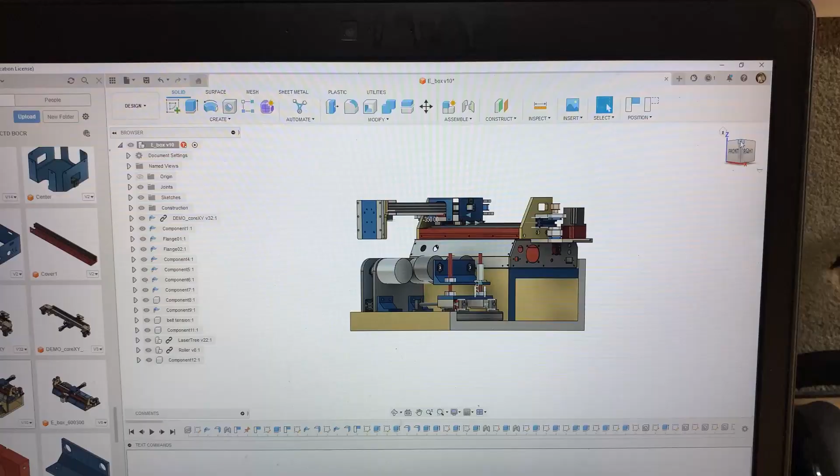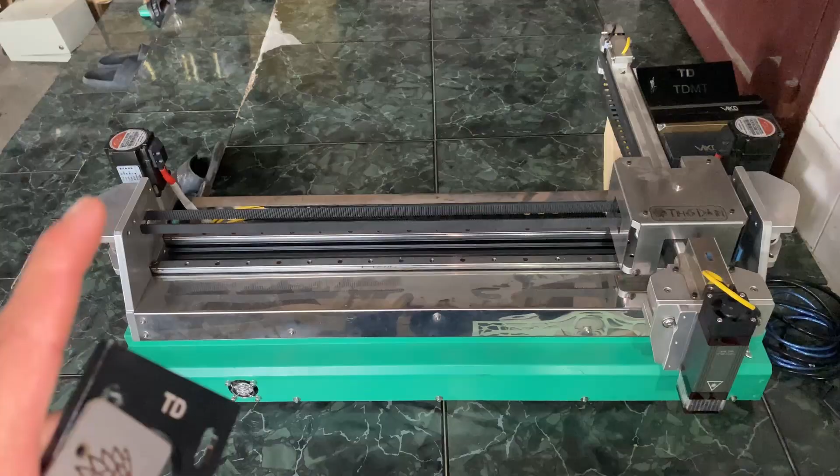I've just got a new order from a customer about a laser engraver on metal. This time we're going to work on the X and Y plane, not including the Z axis down here. Here is the old version of the machine, which let me get my new deal. Thank you. As usual, from drawing to real thing, we have to search for raw materials.

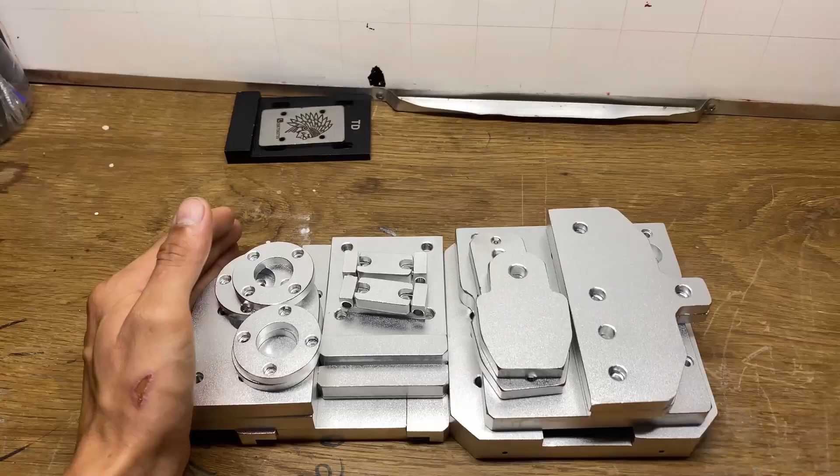The aluminum part is right here. Sheet metal for covering.

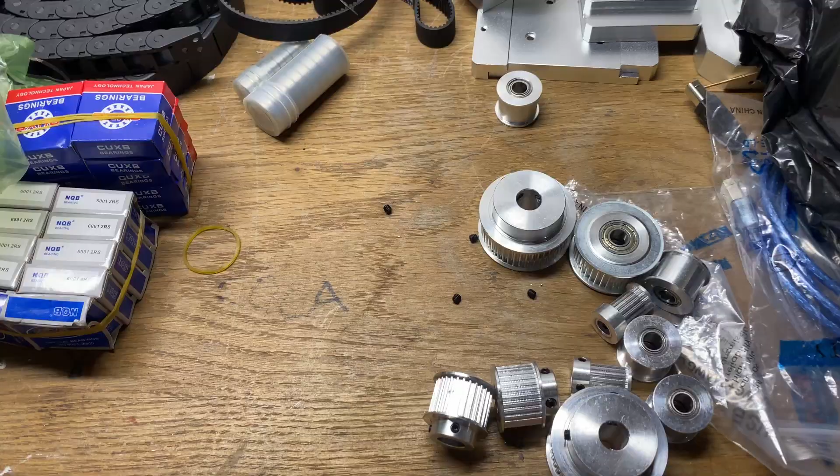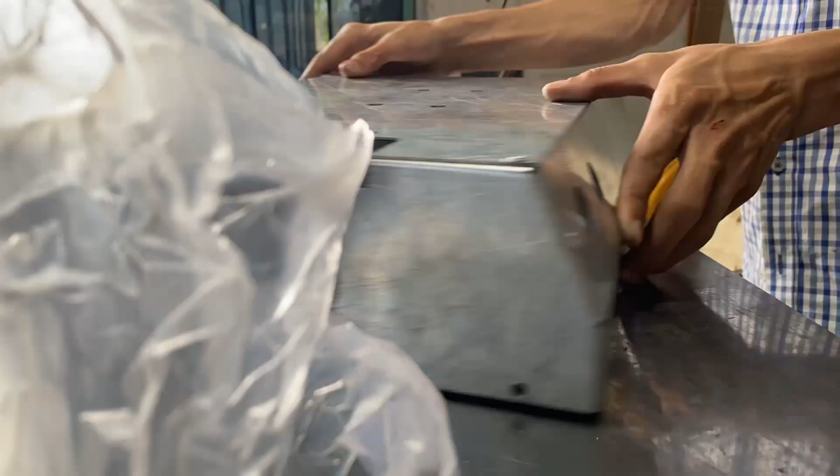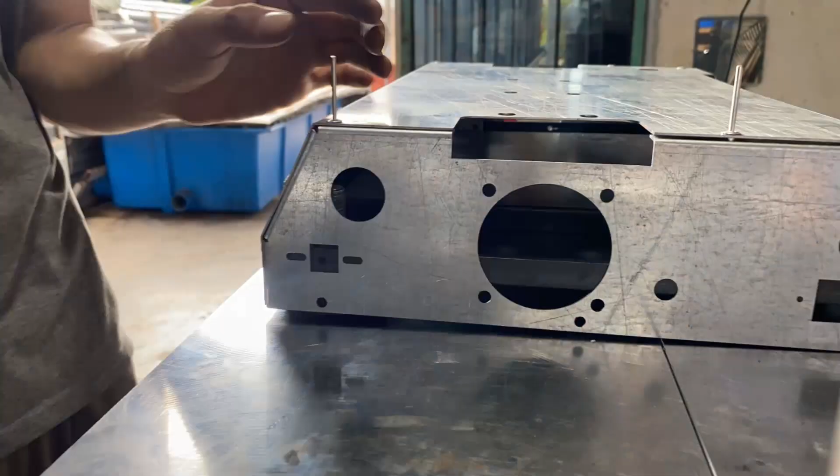Oh man, it got stuck. I should have thought about it earlier. Now I have to drill it out to take the base out of here.

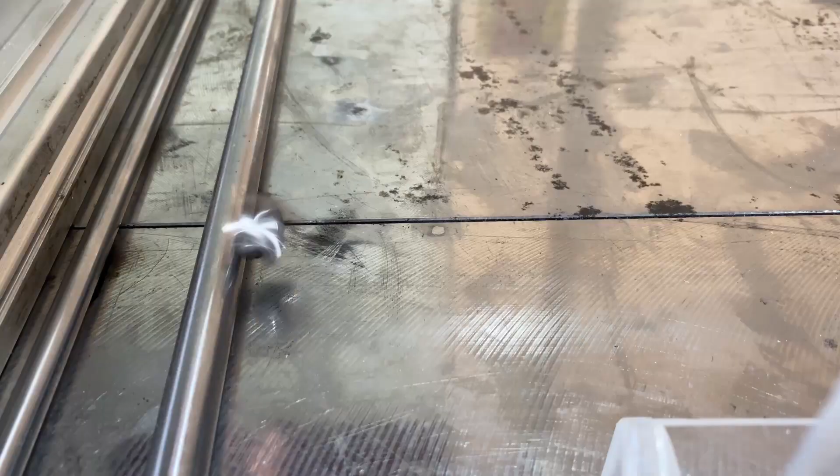The instructions tell us exactly what to do with all those parts specifically and how to assemble them together to get this machine working properly.

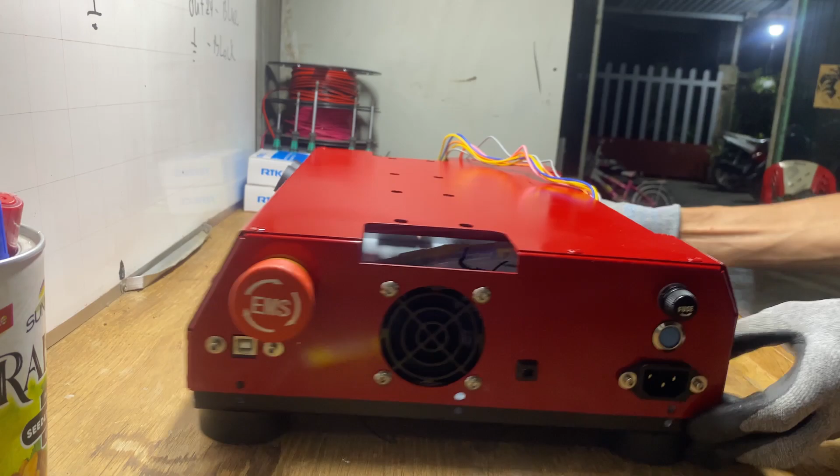Oh man, I forgot to tap the M5 screw hole. I have to take this off. Need the...